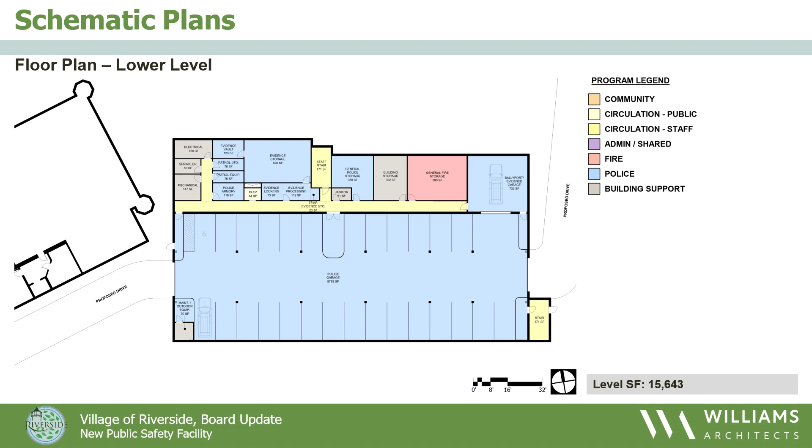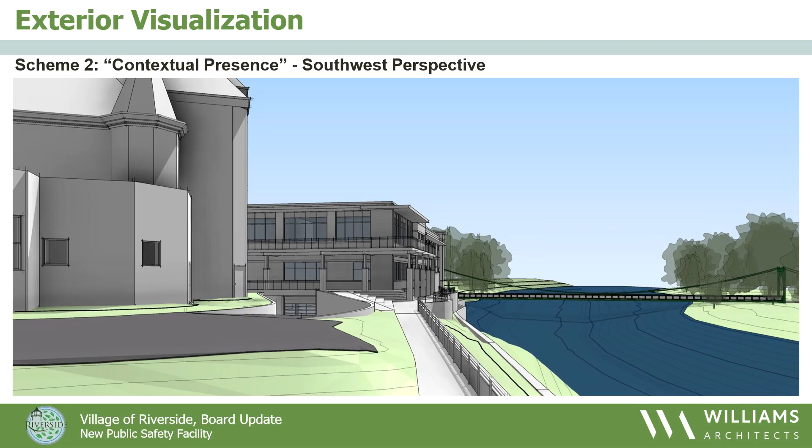Here's the aerial from the northeast, and then the other aerial from the southwest. And also wanted to point out from the southwest views, you'll see a little hint of what we were thinking of as a potential art wall on what's currently a literal blank slate on the back side of the Village Hall, where we just have the lap siding there. Our thought was this could, with the adjacency of the new public space, be an opportunity for a mural or art wall of some kind. So you'll see that in all of the schemes.

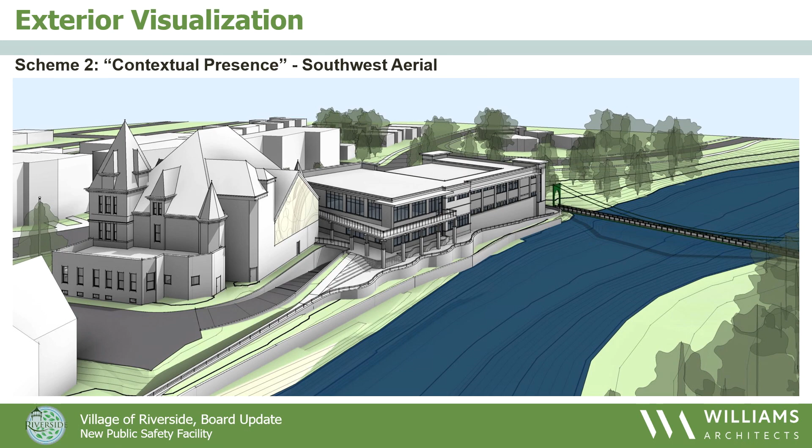The other unique difference on this one, a much more curvilinear approach to the Riverwalk. And with all of these schemes, you'll also see how, in collaboration with our civil engineers, we're keeping the existing retaining wall, and any proposed new work is being held back from that retaining wall from the river. So subtle detail on those Riverwalk schemes. There's the elevations.

Moving on to the next one, I'm going to take the middle two, and then I'll hand it off to another member, so you don't have to hear from one of us for too long.

So this one we're calling spatial framing, and what you'll start to see with this one is this theme of linear bands that encircle and frame certain spaces or views around the building. At the entry, this piece rises up and frames that entry and the view through, and you see a hint of another framing element on the far side, which you'll see as we move around.

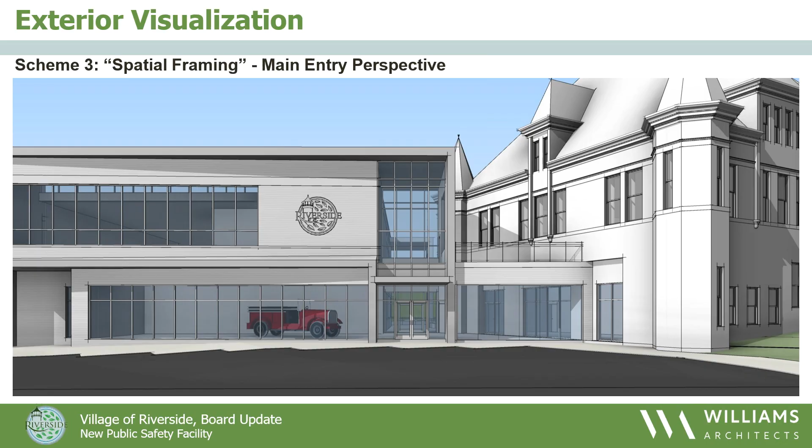Here we've got the stair towers, very similar massing to the others, responding to that program, but rather than the capped tower, it's got this framing element that frames the tower with some glazing to provide light into the stair tower.

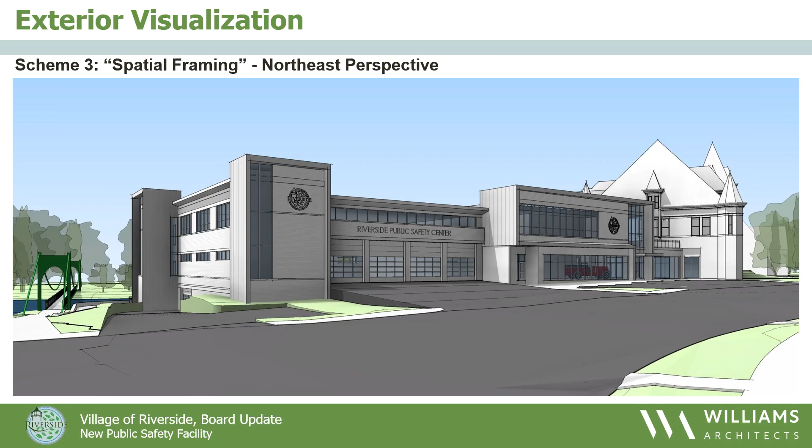The lighting here is based on accurate sunlight that would hit the building at different times in the year. You can see how in morning light, those elements that come out are providing an important feature to help prevent glare and direct heat gain coming into those spaces while still allowing views out.

This one has that framing around that upper piece, so still open to the river, but a little more enclosed.

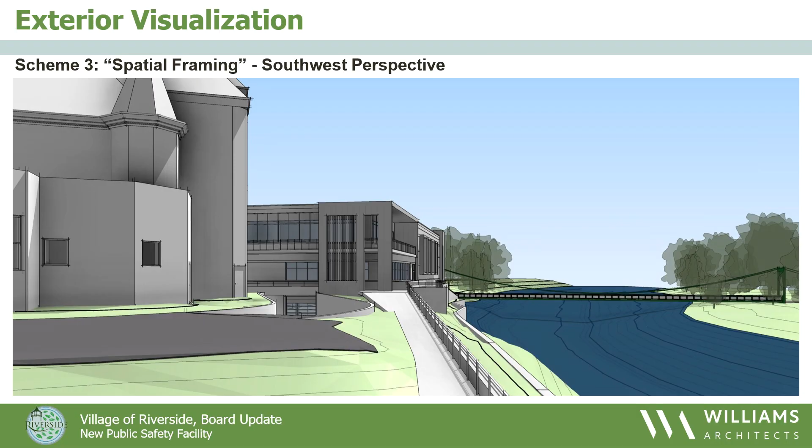Here's the view approaching down the possible Riverwalk extension, and the aerial views.

So more of an angular kind of river walk scheme shown on this one. And you'll notice with all of these, we were providing some stepping, terracing, or potential little planter areas that would provide engagement on the river walk and terrace as well.

So this final scheme, we wanted to certainly show a version that did have pitched roofs and take a bit of a cue from this building in that way, while at the same time not going quite for the steepness that this building has. This is not a building of that era, and we don't want to compete with this building in that way. But we did want to do a version to show you where we use those different roof shapes again to anchor these towers at the corner and give presence to the entryway.

The other thing about this scheme, and why we're calling it traditional anchoring, is we're also exploring smaller punched openings that might lend itself more to an overall masonry construction, again a little more like the Village Hall. And like Joe said, the materiality is going to be another opportunity to relate back to this building in terms of color and materials and those kinds of selections, regardless of what form the new building takes.

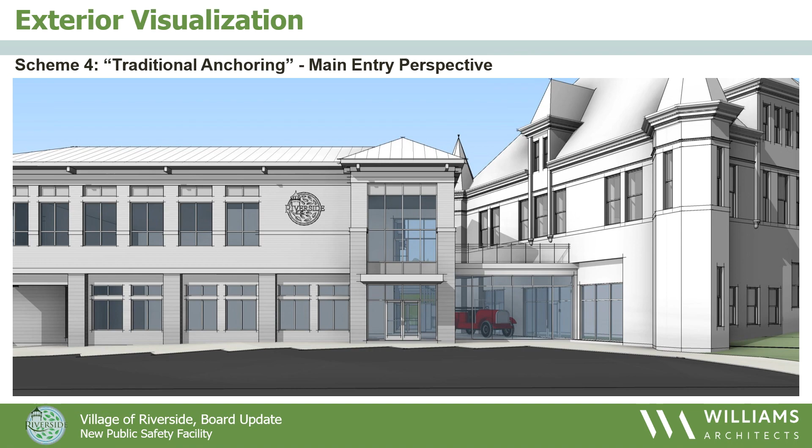So as we move to the south, again, just looking at breaking up some of these areas of glazing, with slightly smaller glazing areas, balancing what might be some additional roofing costs with maybe less glazing costs.

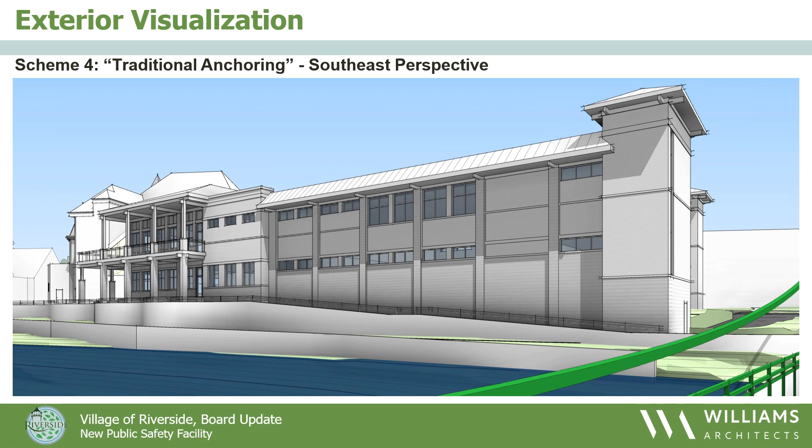And in this scheme, one other difference on the rear here is that because of the roof massing, we've extended the roof out and made this a fully covered terrace, where the columns go all the way up to support that roof structure.

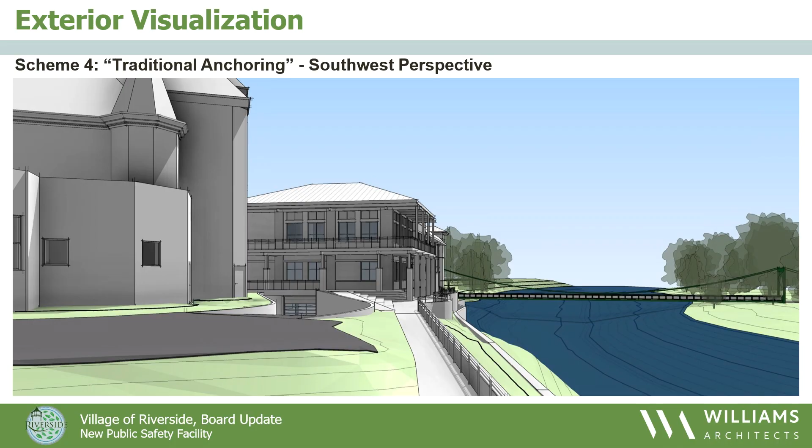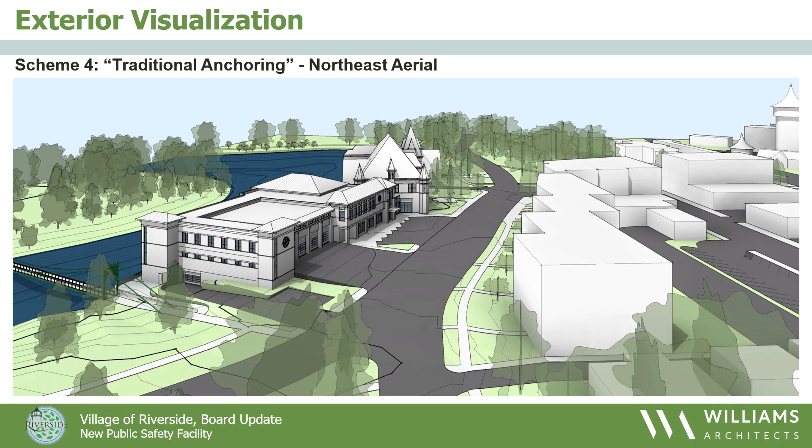Again, in this scheme, we're showing the same kind of river walk element with the curvilinear design as in Scheme 2. Knowing that we aren't the landscape architects, we're the architects, but this building has so much integral relationship with what we know will be an important future river walk. So regardless of, or even at these early stages right now, we want to make sure that the architecture of this new facility is addressing that outdoor space, even at a conceptual level, and being informed by it.

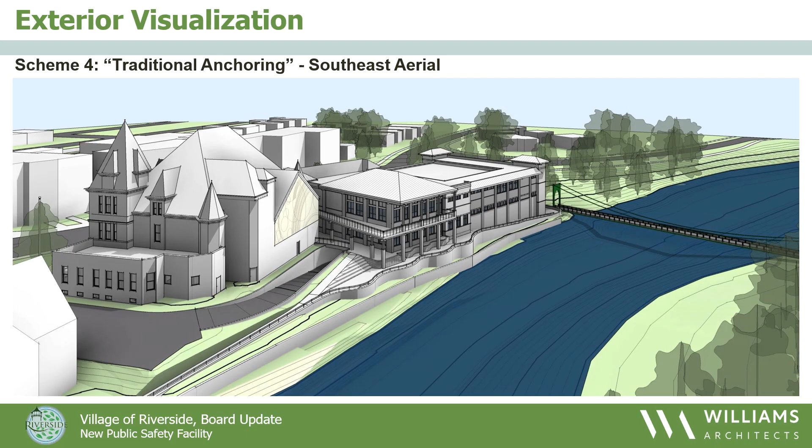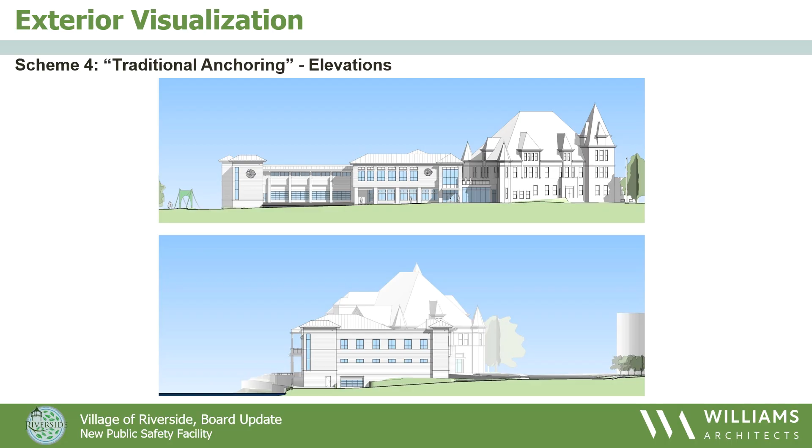So again, as Joe mentioned, all of the schemes have that public art opportunity, so if you're enjoying this terrace, you've got a nice view of that public art opportunity. And there you can see a little better in elevation how those roof elements relate but don't compete with the Village Hall.

So just to kind of recap, so you can see them all in one place, we thought it would be helpful. Again, hopefully seeing them all at once reiterates the point we've made about the overall massing, breaking it into public, fire, and support elements, and using those towers to anchor the corners and mimic the existing Village Hall in that way.

And again, just the slightly different Riverwalk schemes as placeholders of that future idea, and how this terrace space might start to relate to a future Riverwalk.

Okay, do you want to stop and take some questions on the overall schemes, or go all the way through? I'd say go all the way through. Great. Do you want to introduce Chris or no? We'll turn it over to, yes.

Well, thank you, everybody, and it's a pleasure to be here and glad to meet you. I know I've worked with a couple of you in the past on different projects, but as a little introduction, again, Chris Kozak with Harbor Contractors. We're a 67-year-old construction management and contracting company, and public safety facilities is probably one of our primary market segments. I've been with the company for 23 years, and I don't recall a time we hadn't had an active public safety project going at any one of those times.

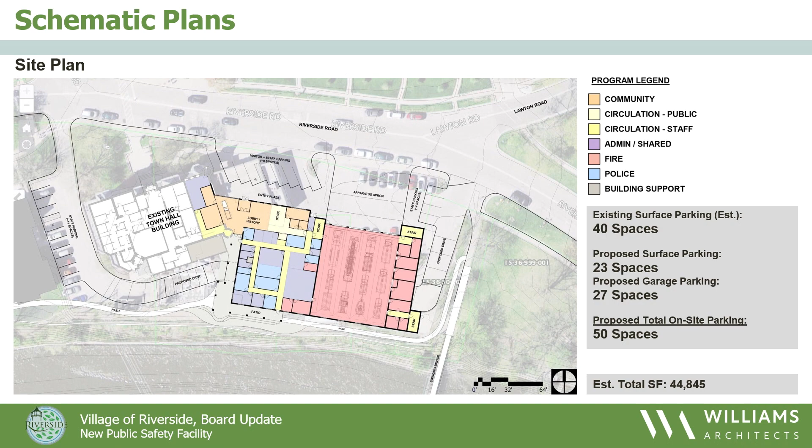The site plan question leads into another one of my questions about all the schemes, and that is for the mechanicals for the buildings. A lot of places put their air conditioner condensers on the roof. I just wasn't clear on where the intended place for that was and whether they would be visible or somehow enclosed.

Sure, I can answer that question. We haven't determined the exact mechanical systems for the project yet, but it's very likely we'd have something for cooling and ventilation on the roof, which would be fully screened. That lower roof over the apparatus bays is an ideal place for that. I haven't studied your zoning ordinance in great detail, but I'm relatively certain it would require screening of those units.

So that would handle a lot of the ventilation and cooling. Heating, we can look at options indoors. We do like to do these facilities with hot water heat and then air handling units, which could be in the basement and mechanical rooms. But we do anticipate some degree of equipment on the roof, and for that equipment to be screened.

Are there any of the particular designs that would be more amenable to that? It seems like some of them are pretty flat and low. Yeah, I think it's something we have to study, to be honest. In my mind, the more contemporary or low slope or flat roof concepts, with more horizontal elements, lend themselves to those mechanical enclosures a little better, because we could use more horizontal elements to help with the screening.

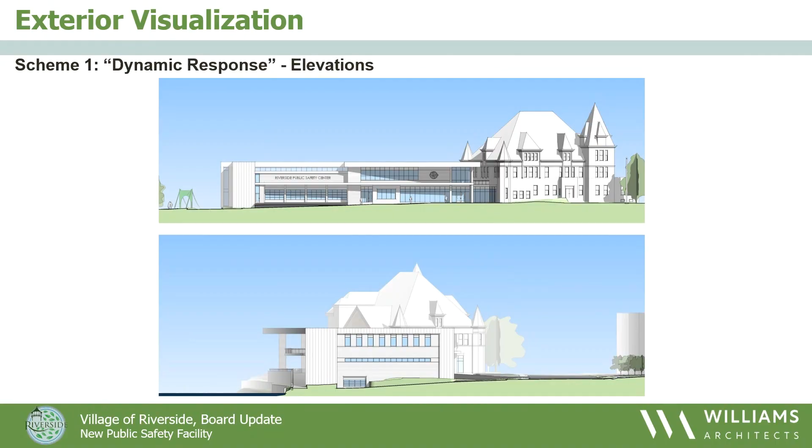The other thing I love about this one is I love all the glass, and I feel like if you are inside this building, you're going to get a ton of natural light and feel much more like you're in nature—way more so than what we were talking about with the last scheme, where the openings were smaller. I really felt like this would feel much more connected to the river and the forest around it, more so than some of the other designs.

Any other comments on this? I have a question. So it looks like the roof on scheme one is pitched. Does it go like this, or is it straight across the top?

I mean, it will have a pitch to drain water. There are a number of ways that we handle that, and even with the pitched roof, beyond that fascia element, the large horizontal band would stay flat. So it may be a little bit of an optical illusion with the way that it bends around the turret, and so it does kind of look as though it's peeking up, but the intent is that it be a really strong horizontal band of fascia all the way around the building, and that movement is more in plan view.

I'm happy to provide my thoughts. Initially this wasn't my favorite, although I liked it. I still like it. Trustee Marshazga and Trustee Koss may convince me that it's the favorite.

But what I do like about it a lot is all the glass on the front side. I think that it's symbolic of transparency. It connects it to the exterior. I really like that part of it.

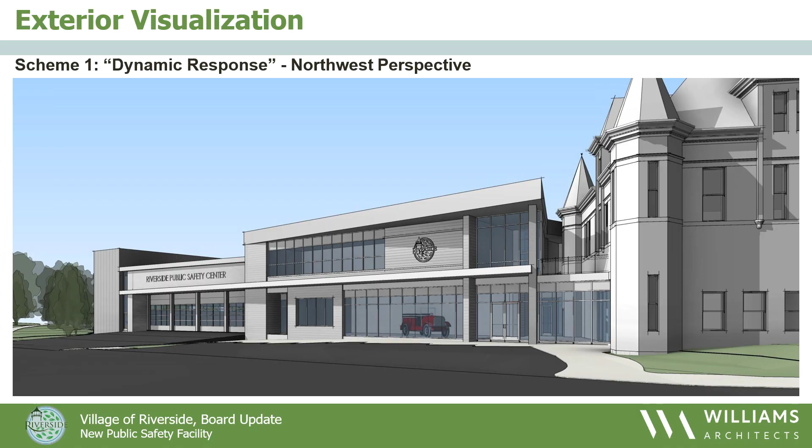I like the horizontal lines. I like the—small thing, but I really like the sign frieze above the garage doors, the opportunity to have that branding there, that Riverside Public Safety Center. I realize you could do that in other ways on other elevations, but on this one, it's got a nice, perfect—it's like it's designed to have that. It would look empty without the sign on it.

What I am hesitant about with it is the blank wall that we're looking at right now, on the left side of the bays. And then on the back side, yes, I like that, okay. Initially, I thought there was too much blank wall, but maybe not.

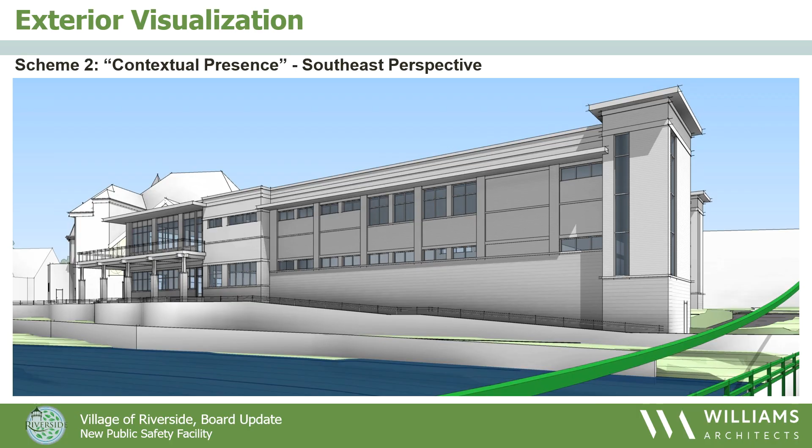From that perspective, it made me feel like there were too many blank walls. But those were my thoughts. Does anyone else want to weigh in?

We'll go on to the, go ahead. I like all of them. I think we all do great work on it, and I like how the facade is broken up. For me, this design doesn't break it up enough, and I know that's intentional to take that straight line all the way across the main part of the building. Just my personal preference, I don't care for that.

I would just like to see a bigger emphasis on the windows in the back, just because that's overlooking the river, which is our most important resource, I will say.

One of the comments on this scheme in particular from the group about the glass on the river side was a concern for vandalism. As we were having this discussion, they mentioned broken windows facing the river. So from a practical standpoint, we wanted to show a variety of options with more glazing for views, and that's why in this scheme we really tried to focus on where people are occupying the space for long periods of time, having views from the living spaces.

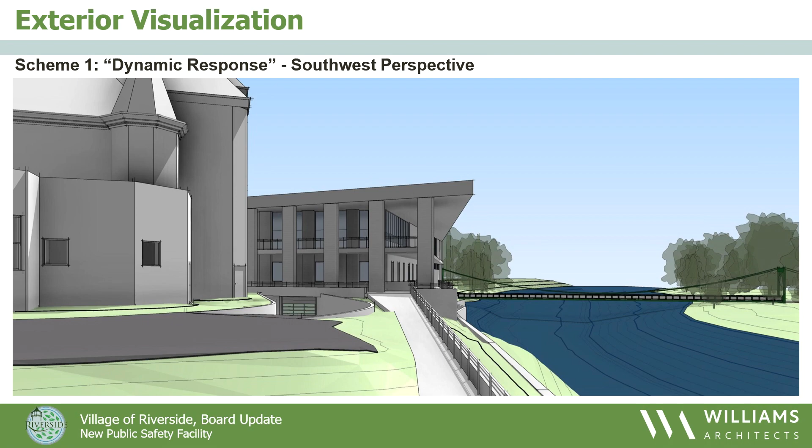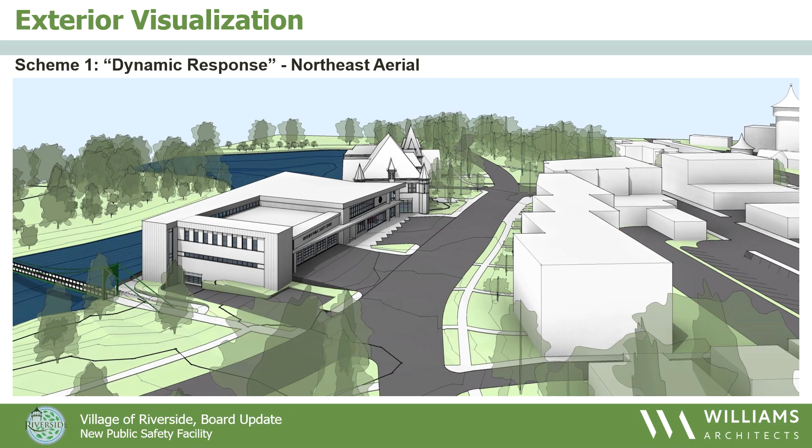In this space, which is the dining room, there are windows looking over the apparatus bay on the other side, and there are also windows lower looking from that space into the apparatus bay. So I think what's throwing off that view of the glass is these windows showing through from the back view. But thank you for pointing that out.

Also, I want to mention, where you see the most windows are the public spaces, because that was staff's focus as we met with Williams. Yeah, it doesn't make any sense to have windows there. It'd be cool to have textural architecture design in the bottom part where the bay is, but it doesn't make sense to have windows there because that's where all the trucks are and stuff, and like you said, they can get damaged. That's not a great spot for it - as much as I would love it, there's not a lot to see and not a lot of people looking even from inside.

It may be that the selection of exterior materials will impact this view a lot, as well as the landscape and ramp design, other things we use to fill in that lower space. There are opportunities both for landscaping and material change to make sure that's not a large blank facade. Any other comments on this one?

So let's talk about number 2, contextual. Sorry, they're really small on my screen. So I'm seeing a lot of the same shapes, roughly. There you go - oh, that's the rear view.

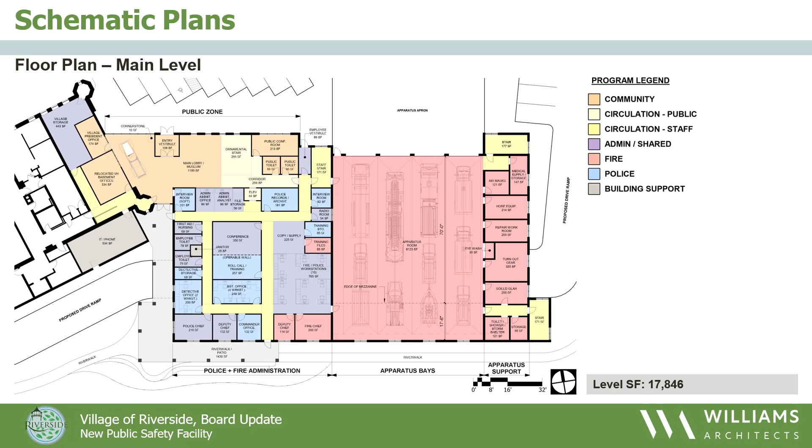What I liked about this one was the roof line, the cornice line. It puts a definitive end on the height of the building, which probably gives it a little bit better relationship to the town hall building.

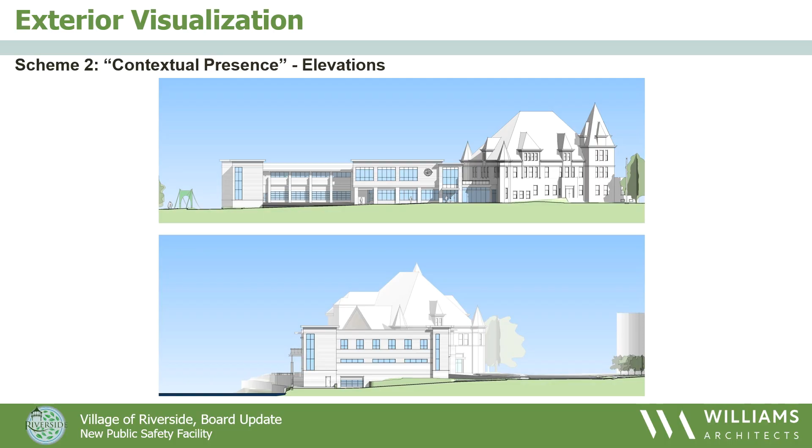The turrets or the columns, if you go back to that corner piece on the left, has windows. It has a cap. It's like a traditional Roman column or whatever. I think it'd be an Ionic column, or Doric. Doric is the one with the swirls at the top. Ionic has the curls. Corinthian has the leaves, yes. Right? So it's Doric, Ionic, Corinthian.

Doric, the simplest Doric. Please tell me you got that on tape. Please tell me that somebody videoed that. That was awesome. Well done. My work is done.

I like the backside of this one, but quite honestly, equally, I like that it's cost less. I mean, that's not a deal. It doesn't cost enough less to where if I didn't like it, I'd do it. But that's a plus in its column.

I mean, I like this one. I feel like it's fine. It's not as exciting as the other. Yeah, that's how I feel. It's fine. It's not as risky, not as exciting.

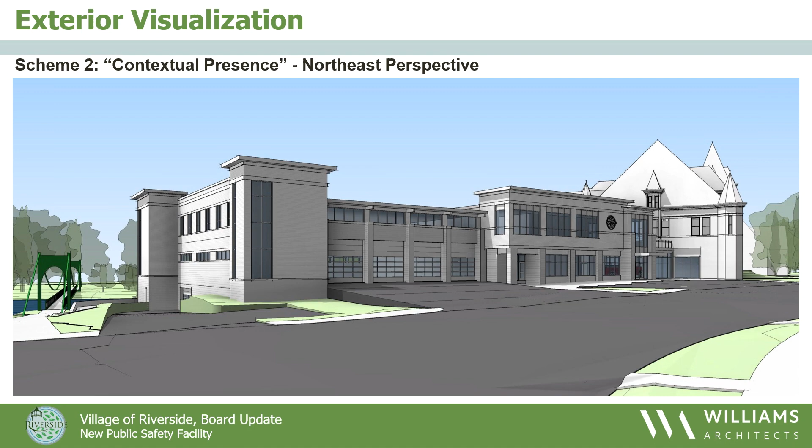And I feel like we're such an architectural village, right? Architecture is so important to so many people in this village that having something that's just kind of fine or, I don't want to offend anybody, I'm really sorry, but it looks like a lovely strip mall, or like a really lovely one, not like your gross corner, you know, but like a lovely strip mall kind of thing. And I don't feel like it has the wow. Yeah.

Any other comments on this one? I agree with Trustee Koss. We are never like this. This is awesome.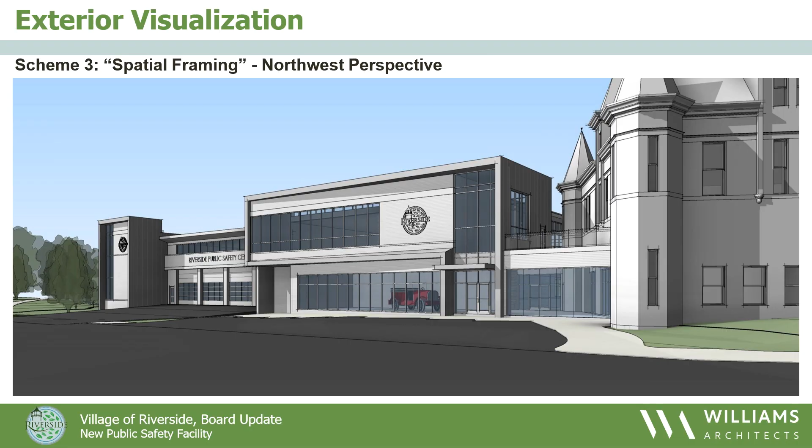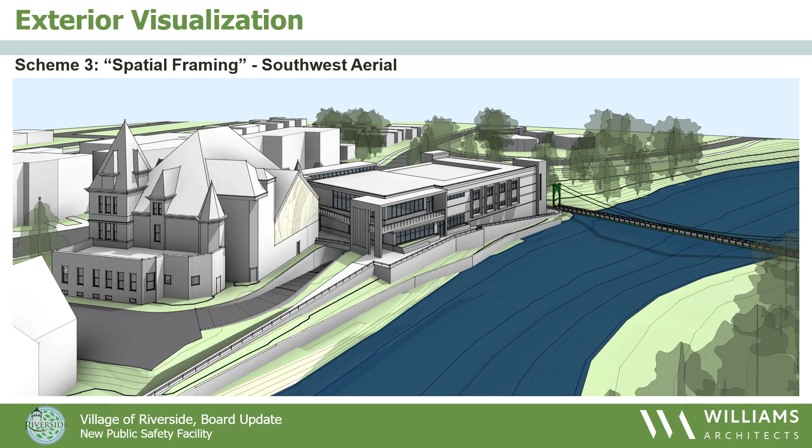I didn't really like the backside perspective. Well, no, not that one - the swinging bridge side. This one? That's good, that's good.

The framing of the columns on the edges, at the corners, and the framing of the window bays seem to me to be not natural, something like that, not organic. Interesting.

So, speaking for myself, either one or two I'd prefer over this one. Does anybody feel any differently from that? Good, we can move on to number 4.

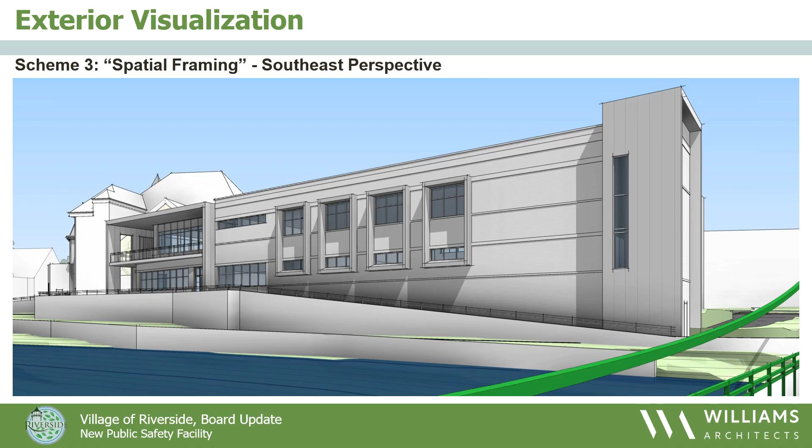Traditional anchoring. This is the most expensive one, right? Mm-hmm. And that's, I'm guessing, because of the roof, almost entirely, if not entirely - which I did like the roof on this one.

Others, comments? This is my least favorite one. Again, I'm sorry Alex, but I don't love the roof. I also don't love that the windows are smaller and choppier. I like seeing the expanse of windows - I just think it's more interesting with the expanse of windows, and I don't know.

Yeah, again, what I worry about with this one is that it's gonna look like we tried really hard to make it sort of look like the building next to it, but it doesn't really look like the building next to it, and people are gonna be like, we tried, but we didn't, and it's gonna look not right. Not that you wouldn't do a fantastic job on it, but.

But you're absolutely correct, Trustee Cost, and you've commented before - I think historic preservationists would say the same thing. Don't try to look just like the other building. Be respectful of the other building, but don't try to copy it.

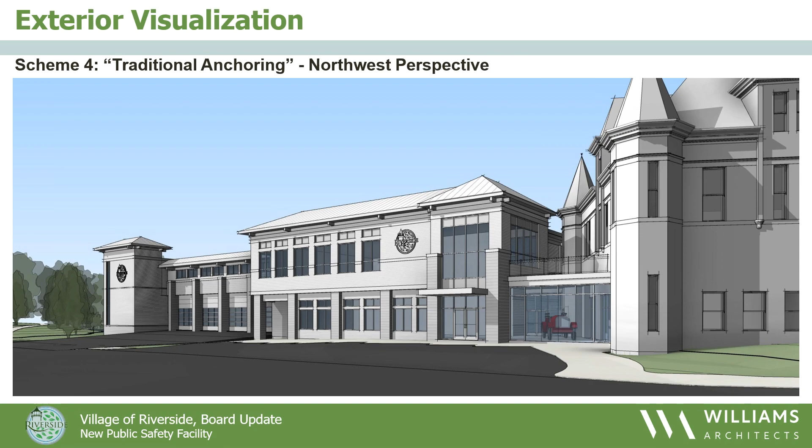Emily, can you put the 4 up again? Yeah, thank you. No, I mean all 4. Sorry, page 175. There you go, yep.

I think that's a good suggestion. So that's the plan, based on the board's discussion - the next step is the April 9th preservation meeting, where we would solicit additional feedback.

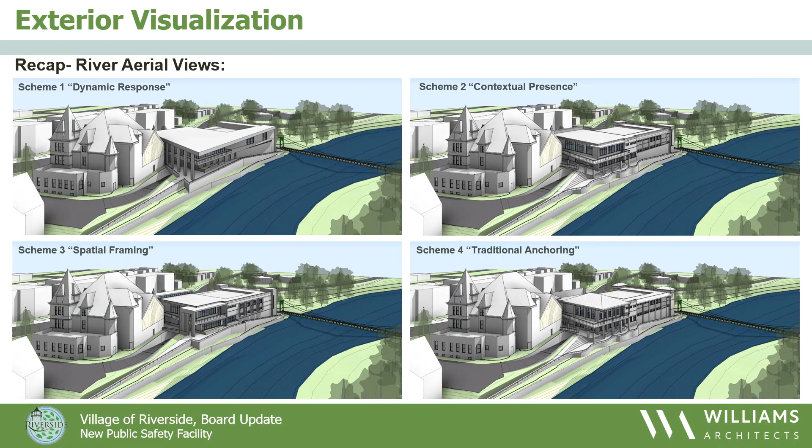And we're going to send 1 and 2 to them? Is that what we're doing? We're going to send schemes 1 and 2? Yes. Well, I mean, they can look at all 4 of them because this is on our website, but the direction would be the village board is asking for their response to 1 or 2. If they have comments about 3 or 4, I wouldn't stop them from commenting - free speech and all.

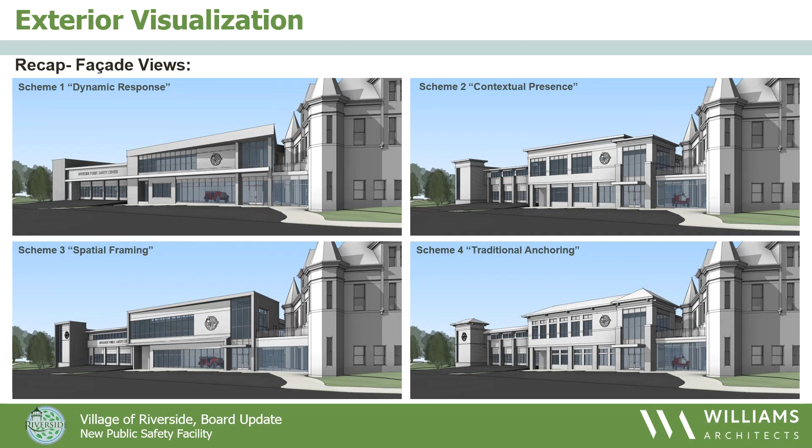Yeah, so let's next go to the cost reduction page. Wait, could we just say one more thing about Scheme 1? Sure. So I think your feedback was that the east-facing side was too plain.

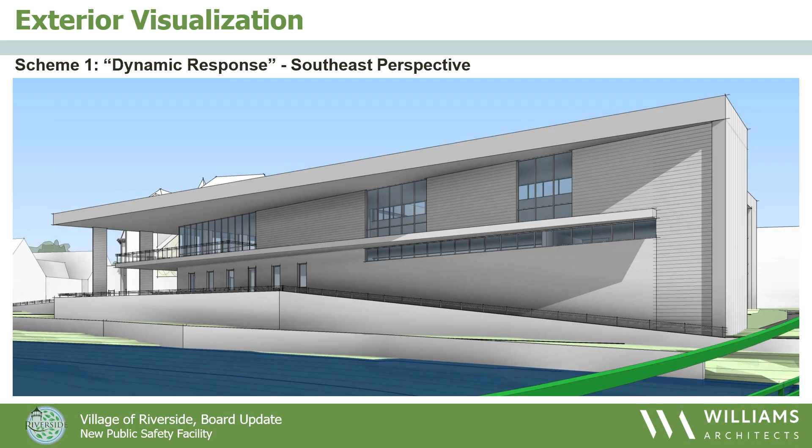Well, it's more that blank column that faces the street - so it's the north, just one column. And maybe it makes sense, and maybe, again, with the right materials, it's fine.

Or open to suggestions on that one. Could you just maybe do something to it? It's a stair, so. Stairway?

Yeah, which you could - like Kristen said, you could do architectural elements. I was kind of thinking in the blank spaces, they wouldn't necessarily, in all of these, be blank - they're just blank slates. I don't know, maybe. Could be a contrasting panel of some kind, right? Well, and I also just wanted to remind everybody that some of the elements could be interchanged.

One thing that came to mind was signage potentially—there's that area adjacent to the entry which makes sense for a good signage location. But there's still opportunity to articulate it with windows. I recall in this scheme the way that stair gets its light is a narrow slit window on the side that's not really visible, but as some other examples showed, that's a great opportunity to do a linear slit window to let light into the stairs. So there's definitely ways that could be further developed.

Cool. Anything else on the elevations? Let's go to that cost reduction page.

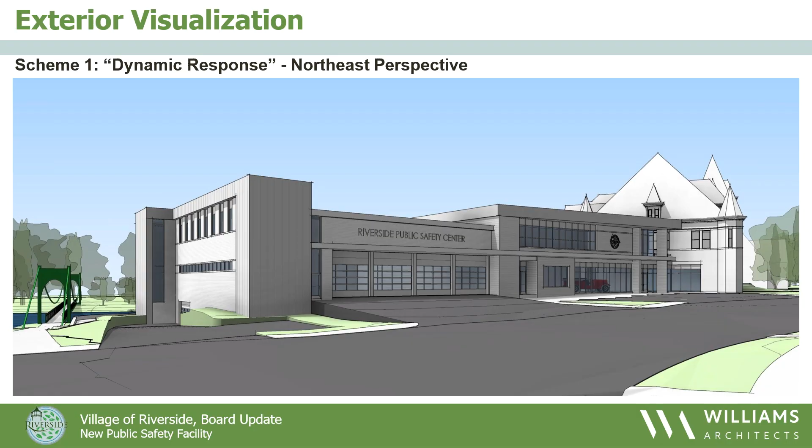Go, Emily, go. Go, Emily, go. You can do it—pressure on her. I'm glad she's doing that. I'd be panicking, I'd be like, I can't find the right page.

We have broken out slides for the cost estimates too that depict more if you need more visual. There was another page though that had the list. Yeah, let's go through that. Reduction in program spaces—that just means making the building smaller, right?

I don't think we want to do that. No, I mean, yeah.

Build shell and core for future—no, that just means spending money later rather than now, when it's more expensive. And if we're going to referendum, I feel like we should be honest and say this is what it costs, just how much money we need.

We talked about the west driveway, and I think we agreed that we would eliminate that. We talked a lot about windows, and if anything, we wanted more windows. So that one's out. And then exterior materials—that's for a future discussion, correct?

We can decide at some point what different materials cost and what the savings are. The elimination of the ornamental stair—I'm guessing trustees don't have an opinion until you see the difference between the ornamental and non-ornamental, right, and how much we save or don't save.

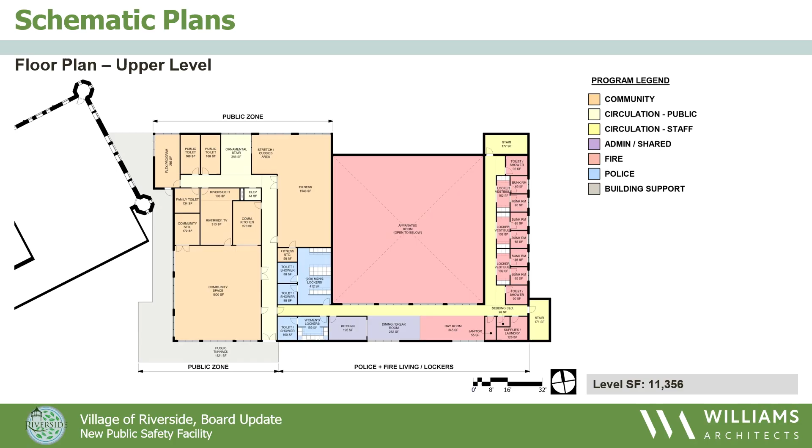Anything else? No, I just need direction. Oh yes, proceed. Yes, please proceed. Okay.

Trustees, any other comments or questions on the referendum or public safety facilities? Just want to thank staff for all the work, and Williams, a tremendous amount. This is really big and very exciting, but it's been a lot of work and heavy lifting, and we appreciate it. Thank you. And thanks to previous boards too, and presidents who have championed this endeavor as well.